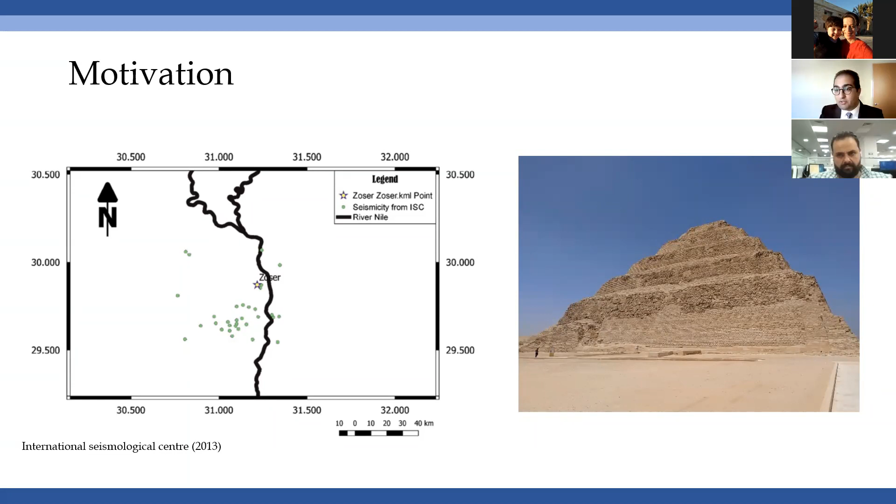To explain the difference between non-invasive and invasive vibration control, we know about several techniques for strengthening buildings to protect them for the next earthquake, like base isolation or dampers. These techniques may be useful for conventional buildings, but may not be useful for unusual structures like the pyramid I'm going to talk about. So we may think to use other techniques in this case.

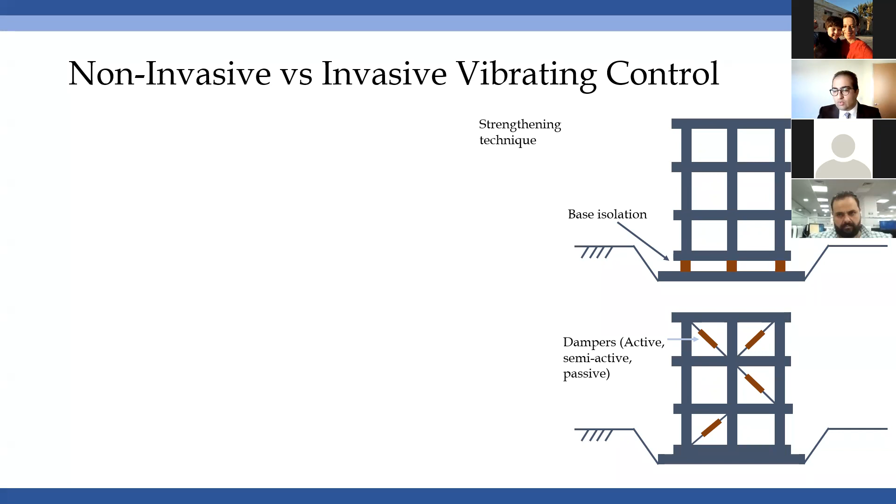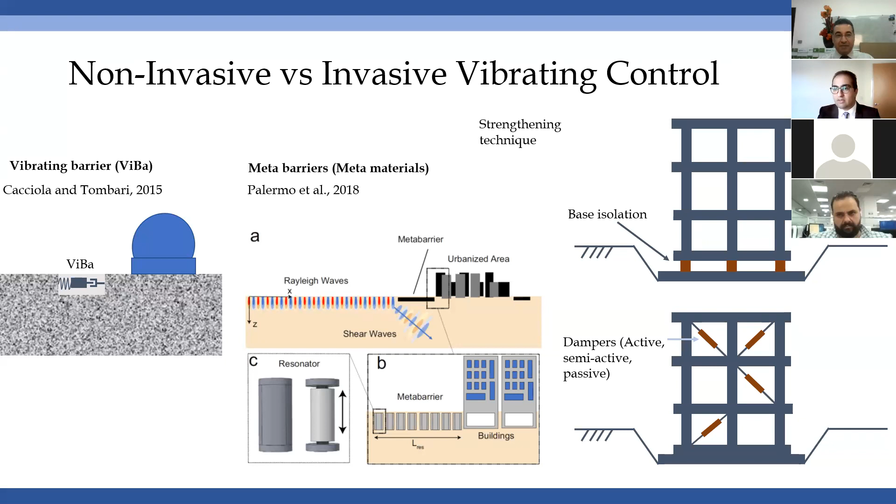But another technique, which is highlighted in this research or lecture, was suggested by my colleague at the University of Brighton, called the vibrating barrier, or ViBa. The vibrating barrier works under the concept of structure-soil-structure interaction. In the next slide, I will present more details about this topic.

Just assume we live in a metropolitan, a dense urban area, so all the buildings are located next to each other. When an earthquake happens, for example, the bottom shows London, the Shard and Tower Bridge. Assume that when an earthquake happens, one building will vibrate, and another building also will vibrate.

But as the vibration characteristics of each building will be different, one building, for example, will be affected by the vibration of another building. This phenomenon is called structure-soil-structure interaction.

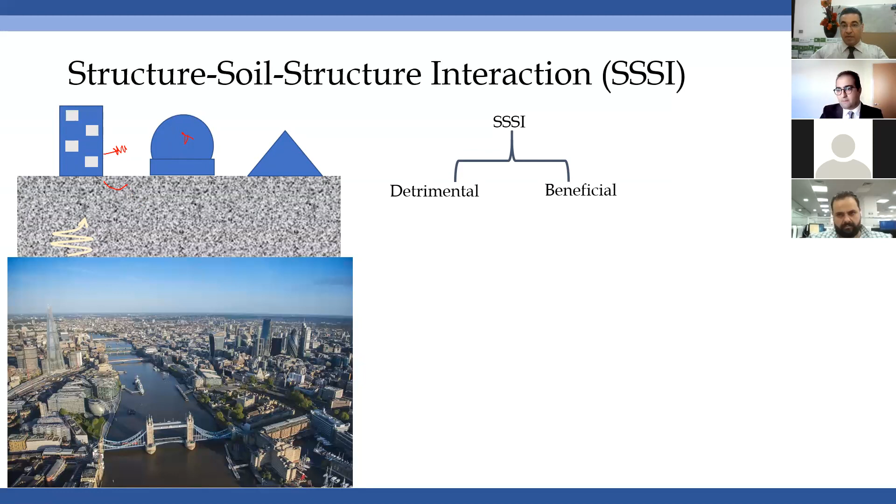As a result, we expect that when an earthquake happens, this structure-soil-structure interaction would be beneficial or detrimental according to the vibration characteristics of buildings. But the point is, ViBa is getting more benefit from the structure-soil-structure interaction.

As a result, we design a building, or a system next to the target buildings, to make sure it will absorb more energy, or it will vibrate to reduce the vibration of the next building.

So this target building can be one building or a cluster of buildings. The cluster of buildings has already been researched at the University of Brighton by my senior colleagues.

But the point is, when we want to design the ViBa, we may need to use several numerical techniques, like finite element model or boundary element model, or we may use the simplified 1D model.

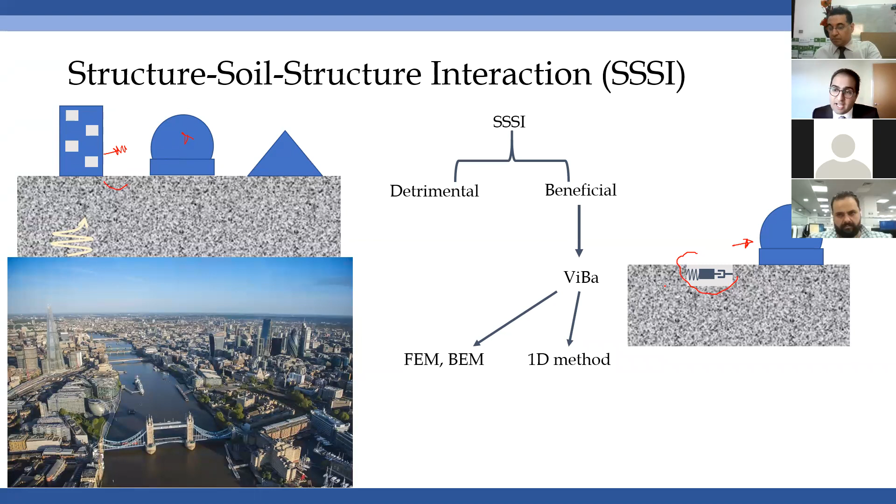But when we are going to deal with the design of these things, we have got several challenges, related to the number of variables we deal with. For example, these variables might come from the structure, like material properties or the nature of the loads, several things.

But at the end, because we want to make sure our design is robust and we are sure about our design for future earthquakes, we need to carry out Monte Carlo simulation, parametric studies, and multi-level optimization techniques. So design is a very challenging topic for this specific vibration control concept.

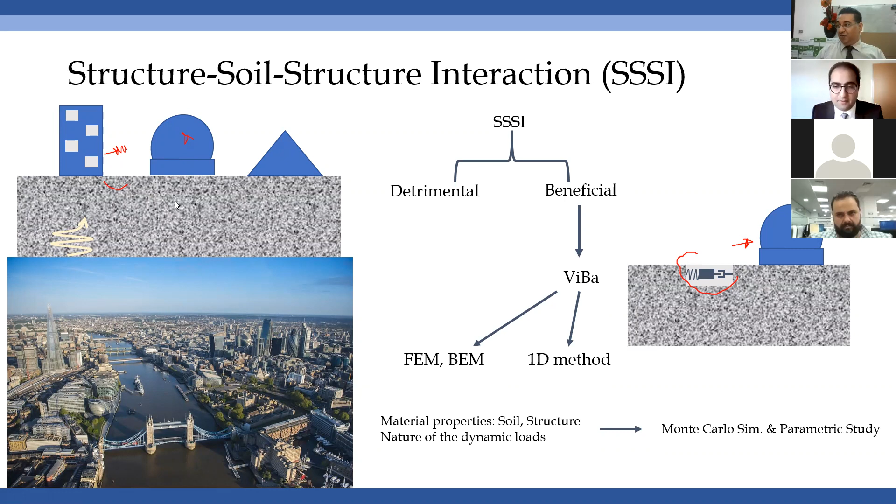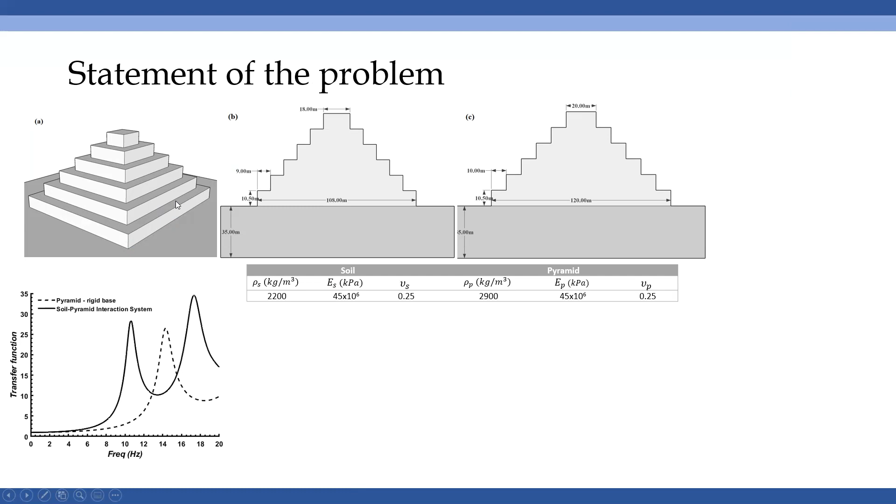Now let's talk further about why it's very complicated. In this lecture, I'm talking about a somewhat simplified geometry of the pyramid. We have already modeled the real geometry of the pyramid, but in this lecture this simplified model is explained.

How's that? We have tried to model the pyramid as a stepped pyramid. But the point is, the natural frequency and the mode shape, etc., will be exactly the same as the real geometry.

Assume we put this pyramid on the bedrock, and when we apply the loading, we will see that the transfer function of the pyramid alone would be this shape. So, for example, the natural frequency will be about 14 Hz.

When we put it over the soil, according to the soil properties we received from the Cairo team, we see that the natural frequency will be around 10 Hz. But another important point about this system would be the role of the second mode in the response.

As you see, the first mode will be 10 Hz and the second mode will be about 17 Hz, and we expect the second mode to have a bit higher contribution into the response. So we are dealing with an unusual structure, not, for example, a usual structure where the first mode has a very high participation effect into the response.

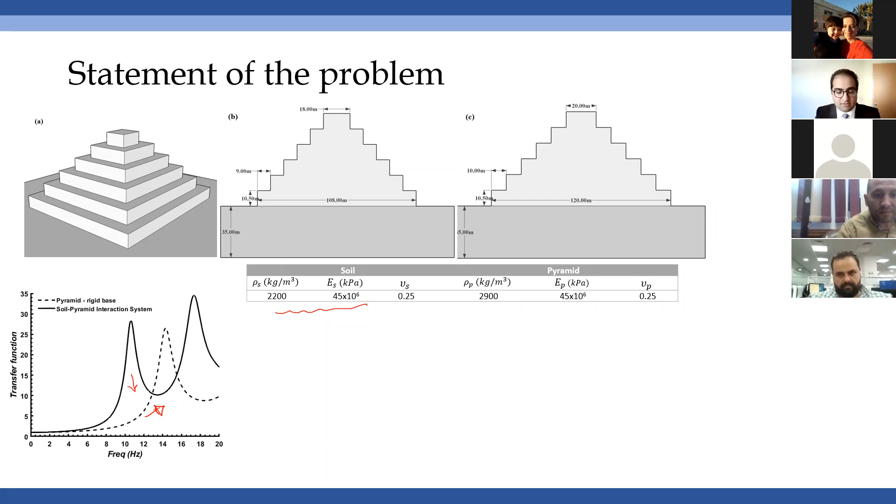So we expect that the pyramid is not a rigid base structure, which means conventional 1D modeling technique may not be useful. What is a conventional 1D modeling technique?

For example, using a spring for modeling the soil, or using a spring-mass system for modeling the pyramid. Using a spring, mass, damper, etc. for the pyramid may not be accurate because we are dealing with two modes of vibration, and also we are dealing with a flexible-based system, not a rigid-based structure. So we need to deal with these kinds of challenges when designing the VIBA, since we are dealing with a large degree of freedom, which creates a lot of challenges.

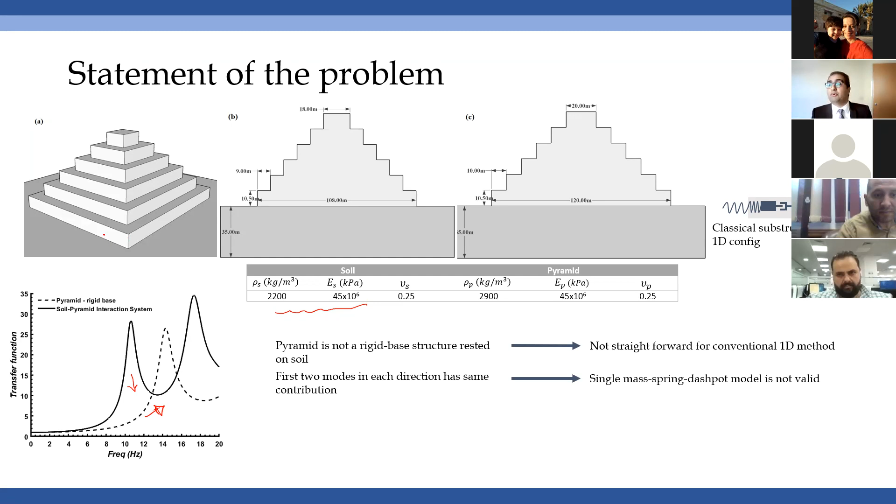Now let's look at it further. For conventional design, as a structural or geotechnical engineer, we normally create a finite element model, then try to change the design variables, do the analysis, and check if it's okay or not. If it's not, we change the design variable. So this is an iterative process: we check it, set it, check it, set it, and so on. This is conventional design.

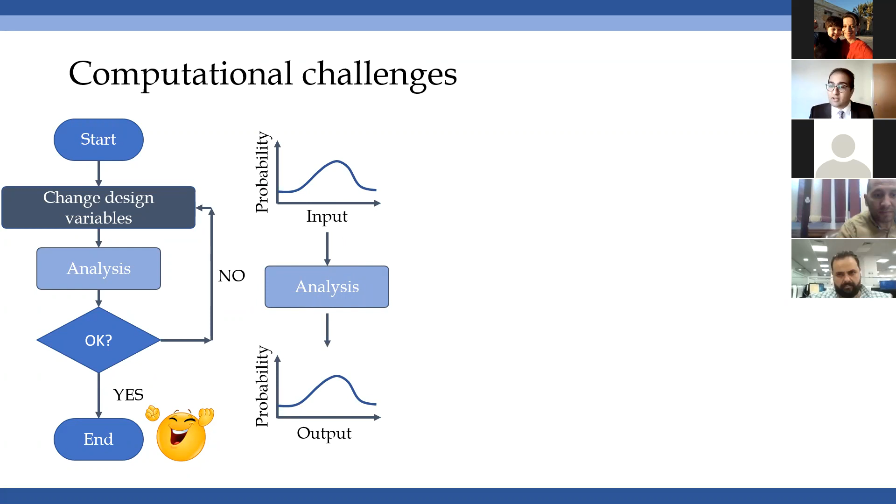This will be really complicated and time consuming when we are dealing with the probability of inputs. In this case, the analysis will be much more complicated. We need to do thousands of analyses specifically for designing the VIBA just to make sure it will be robust and valid for different loading scenarios, etc. That will be really time consuming.

Why is it time consuming? The point is this: when we are modeling the pyramid and the soil, we are dealing with millions of degrees of freedom. As a result, one analysis will take at least, for example, in time domain analysis, at least 2 hours for a normal 20-second earthquake strip.

So designing such a system with these variables, probabilities, etc. may require us to create a new type of model, or reduce the scale, or reduce the degree of freedom of this structure. What is this? For example, we have got the second order differential equation for a structure. We are going to create a replica for that structure to make sure it retains some important properties.

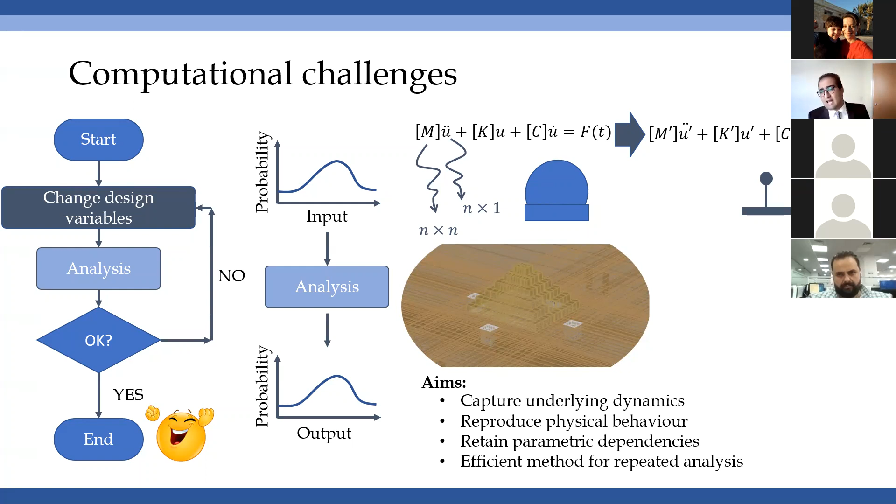What are these important properties? It means that when we compare the target structure and the original structure, we must be sure that we are capturing the dynamics of the system. We must be sure we are reproducing the physical behavior - they must have the same physical behavior. We must retain the parametric dependencies of these systems, and most importantly, have an efficient method, because we are dealing with repeated analysis. So we need to create a reduced order model of this large degree of freedom system to make sure we get the same response.

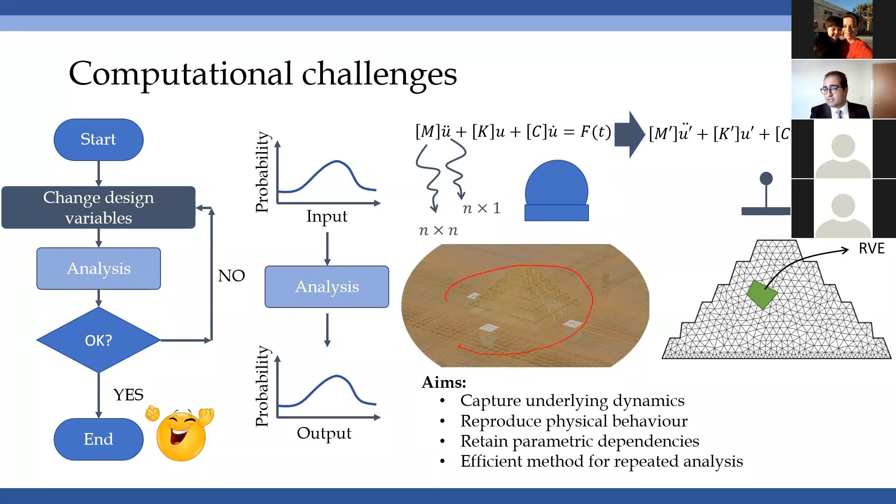You may think that for such a system we could use the homogenization technique, creating an RVE and doing the integration of stress, strain, etc. That's a really cool approach, but it may not be suitable for this project because we are dealing with thousands of analyses. We need to reduce the scale much lower and make sure the analysis is quick. So we cannot use spring, mass, damper, etc. for modeling the structure - this would be really complicated.

But what will our methodology be for the reduced order method, etc.? I discussed the conventional or old method, but now I'm talking about a new one. So old is not always gold - sometimes the new one is really gold. I'm going to talk about it specifically.

Let's say that instead of carrying out thousands of analyses with the finite element model, we just carry out 2 or 3 finite element models. At the end, we save the results into our database, and take them out for the design process whenever we want. For example, we save all the stress components, strain components, displacement, velocity, acceleration, and whenever we want, we take it from our database and use it - we call these components an unchanged matrix or unchanged vectors. I will explain how this happens in the next slide, but please follow me here first.

Then we'll go to the design process, and we will have this loop for the design. But at the end, we will be happy because the process will be straightforward and the accuracy will also be high.

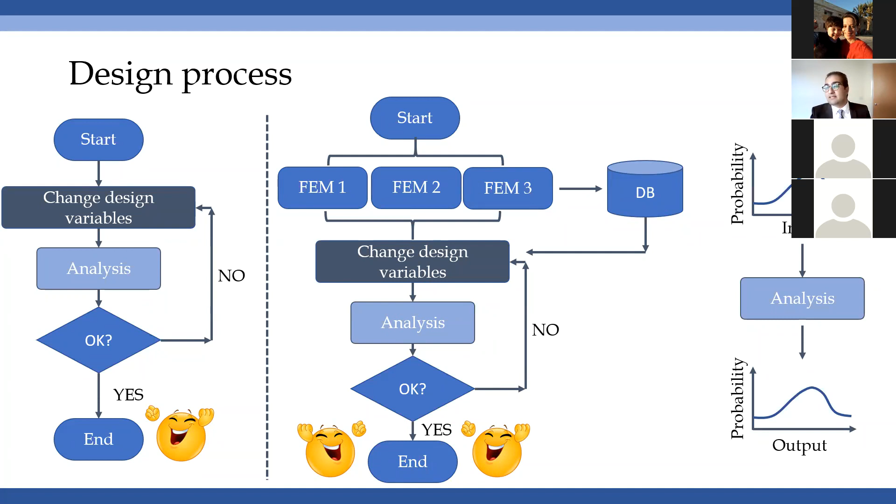For the design and optimization process, we are dealing with several variables, because the function that we generate will be a multi-function or multi-variable function. So we are using the Nelder-Mead simplex method.

This is the concept and design process for the VIBA. This part involves several finite element models with a limited number of analyses, so we use what's called the reduced order method. We only carry out this limited number of analyses, and then use the data. In this case, we can design according to the probability of input, and get the probability of output, using integration, etc. that you may already know about, to get the final design.

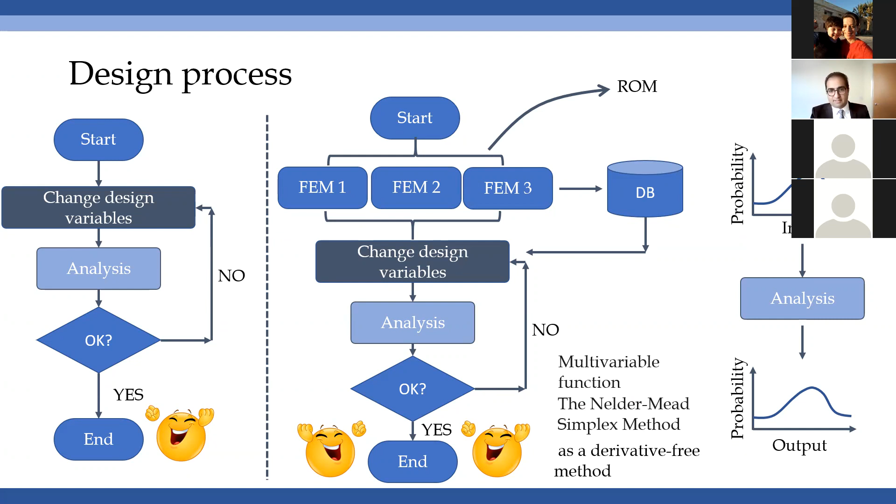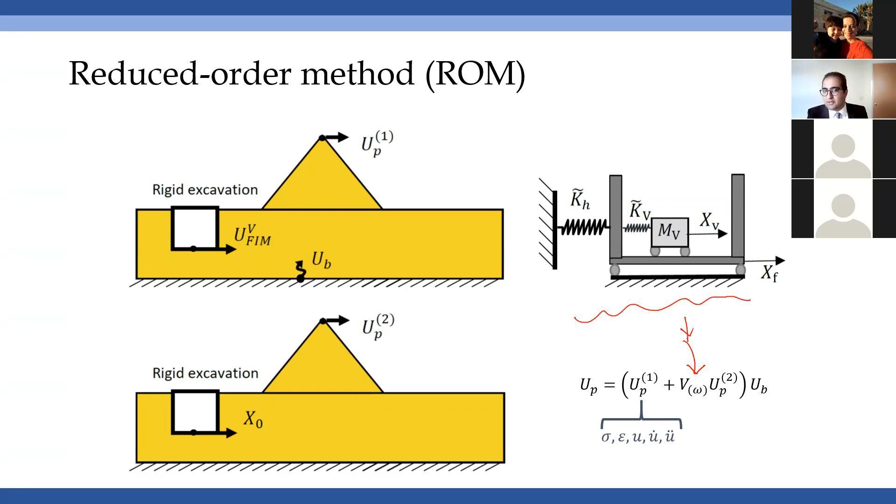So we have this reduced order method. Let's look at the input parameters and their variabilities. First, for this project, we have several inputs or variables. First of them comes from the variability of seismic activity at the Zoser pyramid.

This seismic activity at the Zoser pyramid may have some sources, like the angle of incidence of the earthquake, distance of the earthquake, moment magnitude, and stress drop. So all of these parameters can be considered as a vector inside a general variable, which we call alpha.

As a result, we expect to have a probability for each of these inputs. So let's say, for example, for the distance, we will have some probability, magnitude, etc. We will be able to consider all of them in the seismological model, and accordingly we are able to generate the earthquake at the bedrock.

But another variability that we are dealing with in this project is the geometry and the distance between the VIBA foundation and the pyramid. So as you see, we are dealing with a large number of variables, and we need to consider all of them in our design.

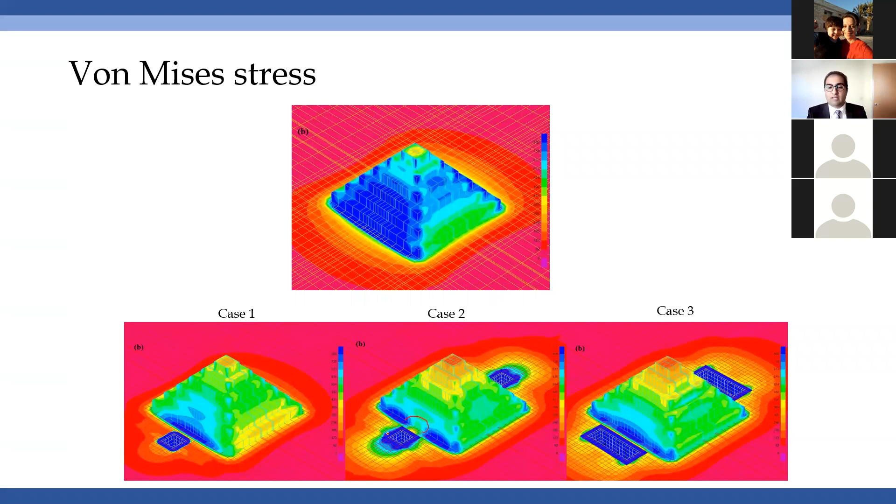So this slide shows that the VIBA clearly works, and we expect that it reduces the earthquake damage on the building. As you see here, we expect very high von Mises stress; for example, when we use the VIBA, this area that's already damaged in the previous earthquake or in the past, we expect to see that von Mises stress reduce a lot.

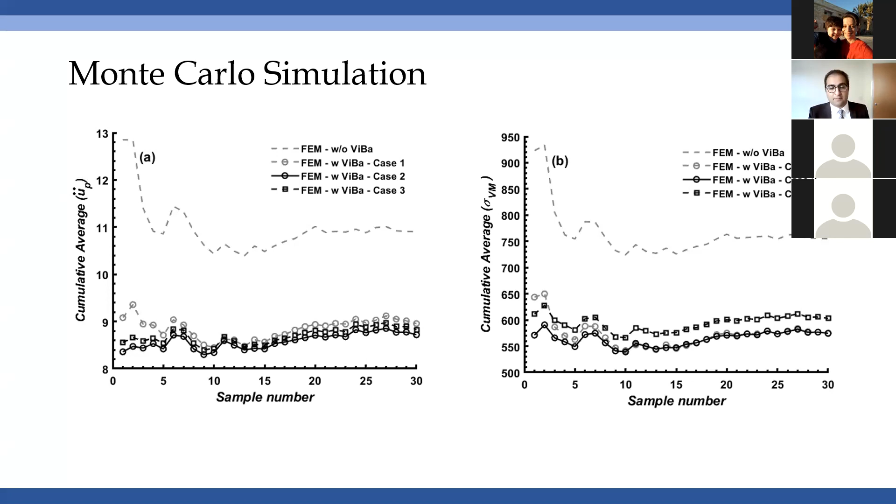So to just conclude my presentation today, we have carried out Monte Carlo simulation. We generated the reduced order method for this specific structure, and we have seen that the peak acceleration has reduced about more than 20%, and von Mises stress reduced around 24%. So we have developed a reduced order method, and we have presented this research at one conference, and we are writing up now a paper for Nature, Scientific Reports in Nature, and we will submit it maybe next week. Thank you very much.

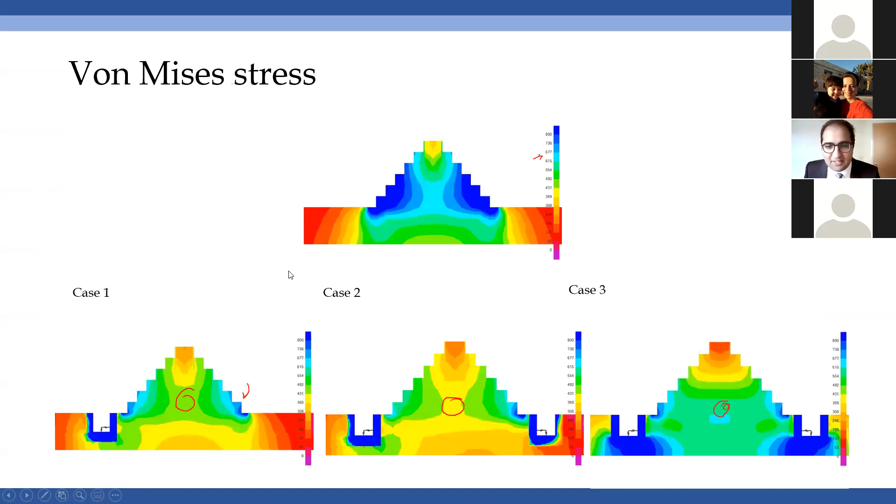Thank you very much for this question. Going back to the first part, for example the dimension of this excavation—this excavation can be like other buildings. When we carry out the excavation, we create the retaining walls etc. It will be a very strong foundation because we expect this foundation to be rigid enough. So we are dealing with this kind of design specifically for the foundation.

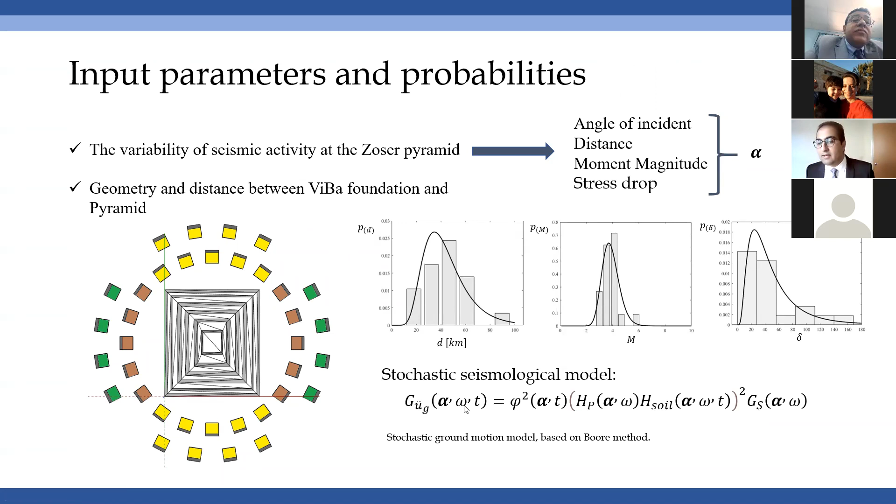For the earthquake input, I talked about the variability of seismic activity at the Zoser pyramid. We are dealing with several variables like angle of incidence, distance, moment magnitude, stress drop, etc. Each of them will have a probability, so we consider all of the probability in this Boore method, and then generate the PSD of the bedrock motion, producing thousands of records. This is specifically the answer for the second part of your question.

I hope I answered. I forgot to welcome Dr. Yasser Al-Hakim. He is my old colleague and my friend, to be honest. Welcome, Dr. Yasser, long time I haven't seen you, to be honest. Do we have other questions?